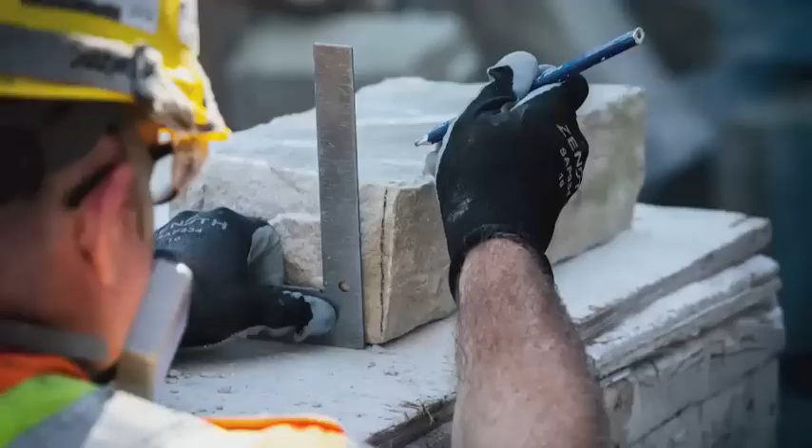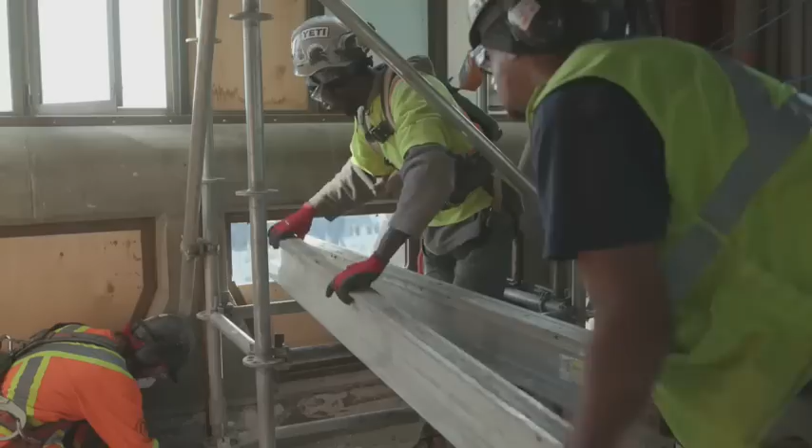Currently, there are more than 450 workers on the site daily, and that number will increase once the project reaches its peak, bringing together a diverse range of experts in areas from engineering and construction to architecture, masonry, and restoration. It is the largest and most complex heritage rehabilitation project ever undertaken in Canada.

At the helm is Jennifer Garrett. Since 2016, she's been the Director General of the Centre Block Rehabilitation Project and is currently an acting Assistant Deputy Minister with Public Services and Procurement Canada, the government department responsible for overseeing Parliament Hill's buildings.

The building was actually in great need of restoration before it moved out. It looks beautiful, and to the naked eye, when you walk through it, one might think that it was not in need of rehabilitation. But the reality is, if you look closely, you will see the leaks from the roof, the places where the building has suffered quite dramatic change. And if we hadn't intervened into the building, we would be actually putting parliamentary operations at risk.

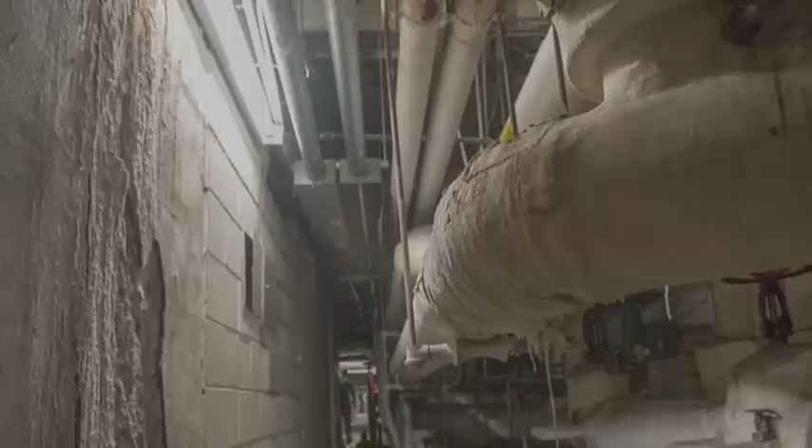For Garrett and her team, the to-do list is extensive. There are also leaks from water and heating pipes that date back to the early 20th century, like these found in the basement. The ventilation system was designed for a time when wood-burning fireplaces heated offices. It now needs to be replaced.

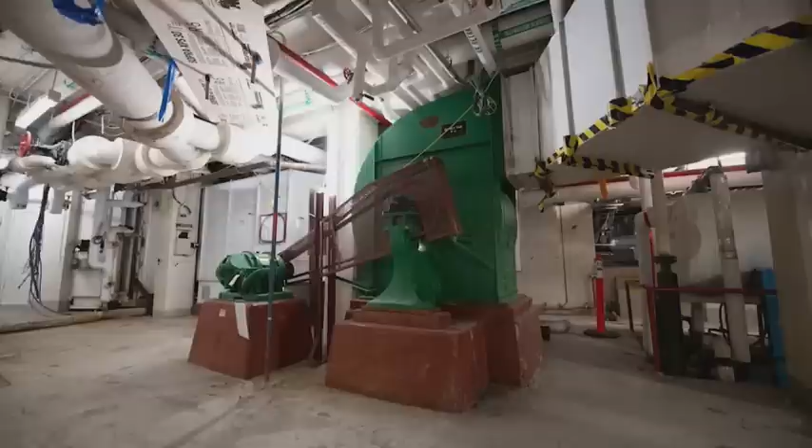There are damaged sculptures, crumbling mortar, and cracked stones. If left unchecked, some of those sculptures and the stone around them would disappear.

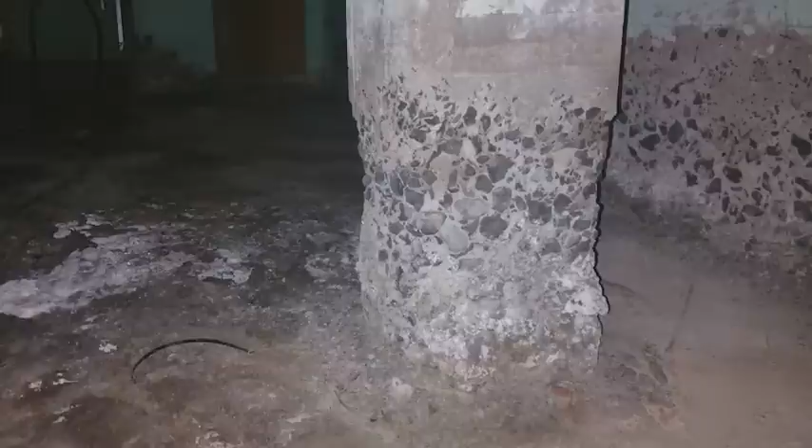The concrete that supports the building is also deteriorating. One example is this column in the basement of the Peace Tower. And there's the steel inside and outside the building - it's rusting and breaking.

The building hadn't undergone a major renovation since it was rebuilt after the fire of 1916. When you get a building that's in the 100 years range and you have an active parliament operating in it, the only time that you really get to do little tweaks to the building are during recesses and the summer period. And that is just sometimes inefficient to do some of the major rehabilitations that had to be undertaken in this building after 100 years.

So that's why there was a deliberate plan put into place to actually create other accommodations for the chambers and for parliamentarians and their administrations so we could empty this building and do what is required to it. The plan saw MPs leave at the end of 2018 and move into a temporary House of Commons chamber in West Block.

And senators relocated to the Senate of Canada building, formerly Ottawa's downtown railway station.

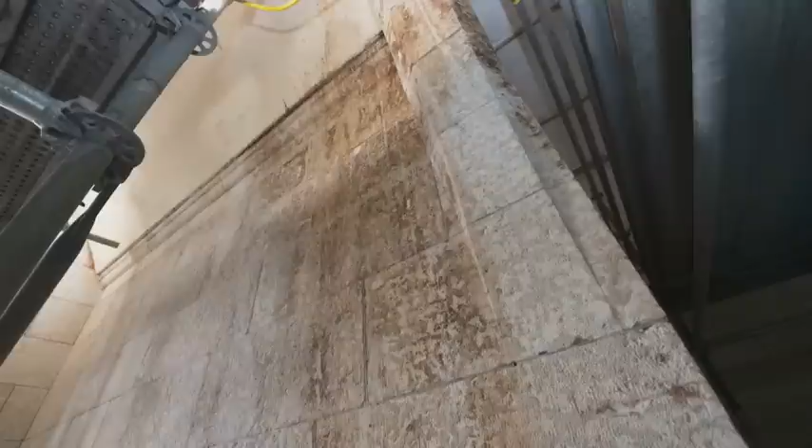I'm happy to say that our operations did a great job of getting us to the finish line, but even then we were having issues at the end—elevators breaking, water infiltration. We had a substantial leak about 3 weeks after the building shut down that would have definitely had an impact on parliamentary operations. So we made it. We made the building run till the end, but it was on its really last legs, and we were really worried about it having a significant impact on shutting down Parliament, which would be absolutely a catastrophe.

We want our Parliament to run.

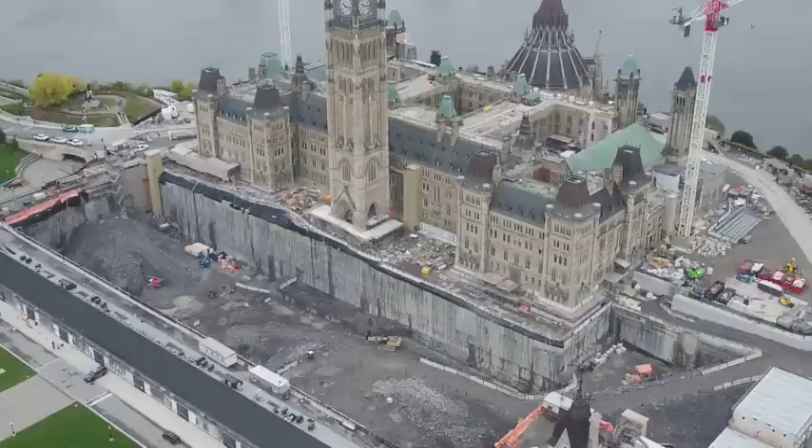The Centre Block Rehabilitation Project is now in full flight, the key part of a decades-long rehabilitation and modernization effort across the parliamentary precinct.

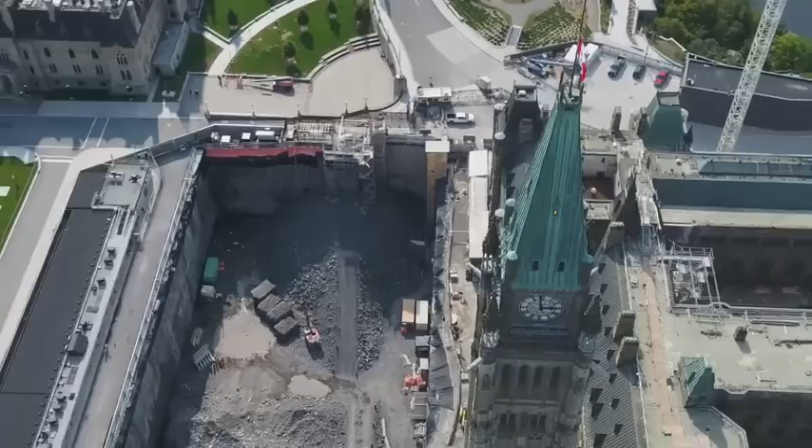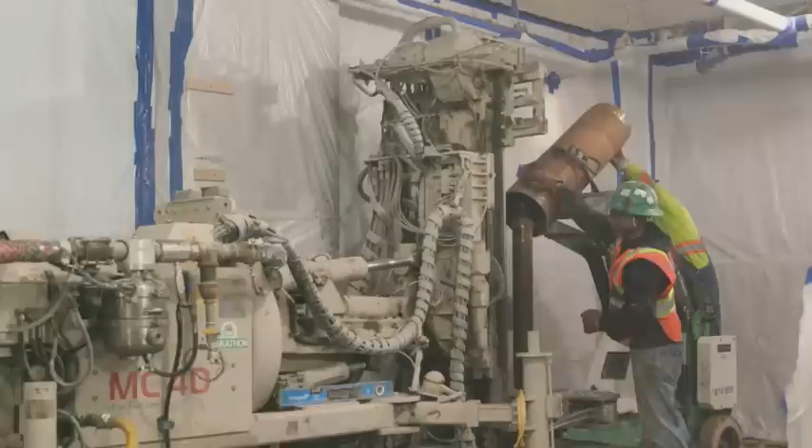The 3 stages of construction are essentially: phase 1 involves taking the building apart. Phase 2 involves building those base building features back up, like doing structural upgrades and putting the mechanical systems in place. And phase 3 is the beautiful part of the job—finalizing the features, fitting up the spaces and how they're going to look, putting those heritage features back in the building.

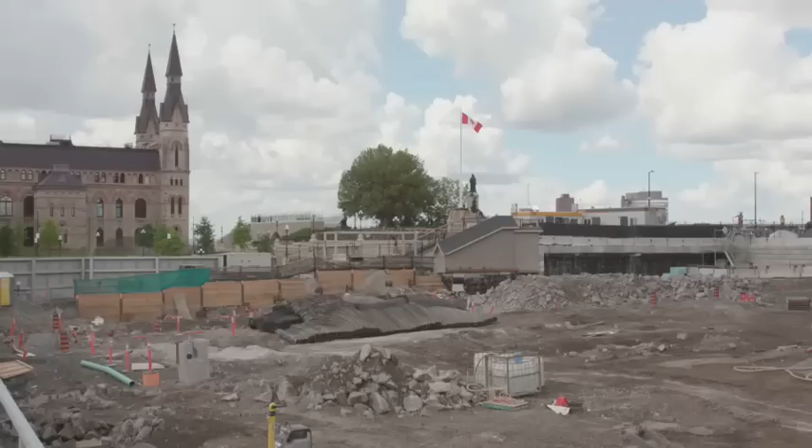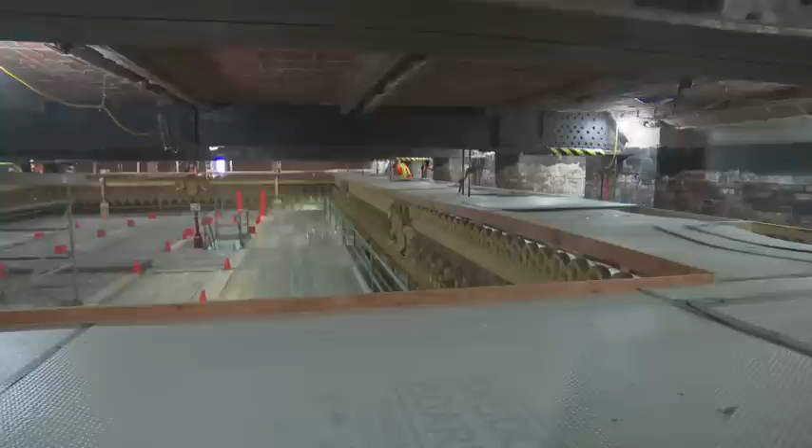Where we are at this current phase in the project for the Centre Block is we've effectively finished phase 1 and we're headed into phase 2. What I mean by that is we've finished the extensive demolition and abatement program to remove designated substances. That finished in December '23. And now we're at the part of the Centre Block program where we're starting to initiate the structural upgrades for the building.

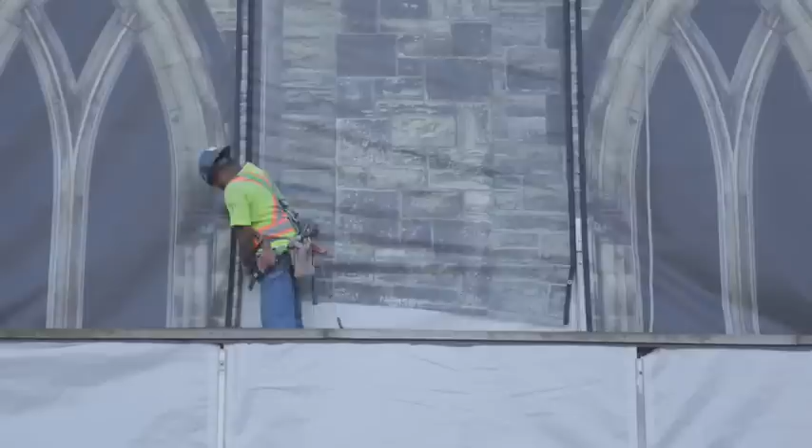It takes a village to deliver projects like these. We do have a plethora and a range of broad-ranging skills working on the program because we're still designing as we construct. We're flying the plane while we design it, and that's a deliberate strategy on our part.

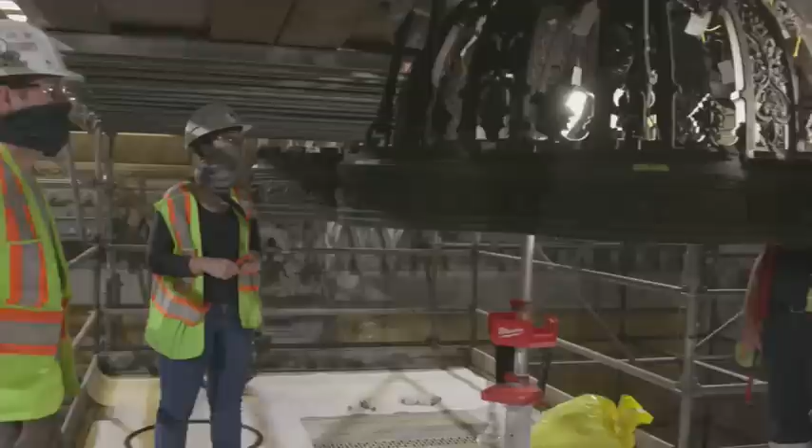And beyond that, as the design continues to evolve and gets finalized, those later packages with the finishes will be released almost like just-in-time delivery to the construction team. That integrated effort allows us to optimize the schedule and ensure that parliamentarians get the building back as soon as possible.

On November 6, 1867, Canada's first Parliament met here in the House of Commons.

This is what Centre Block looked like in those early days of Confederation. Back then, Ottawa was perhaps not the most sophisticated of places. Many had been surprised a decade earlier when Queen Victoria named it the capital. Canada's first Governor-General, Lord Monck, remarked that the place could never amount to much. Lady Monck's criticism was harsher, writing in her diary that they were much disgusted by the squalid look of Ottawa. I went on wondering how we could ever live there.

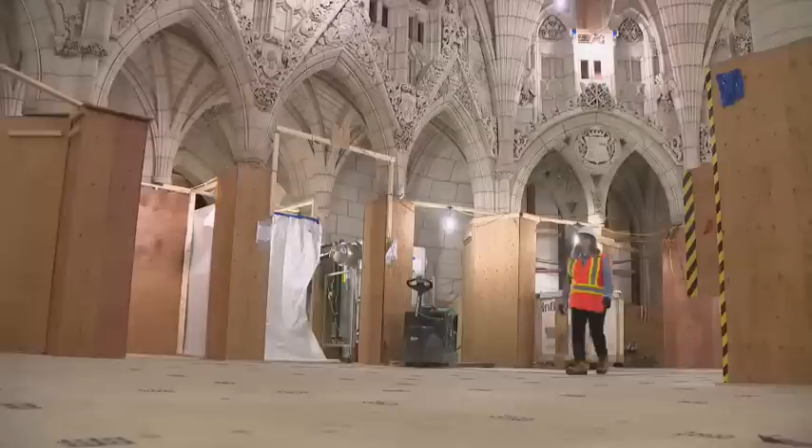Johanna Mizgala is the House of Commons curator. She knows more about the history of this building than just about anyone. To understand the building on Parliament Hill and its context for the renovation and restoration plan, we really have to go back in time and consider the original building, which sat on Parliament Hill and was designed by Thomas Fuller and Chilion Jones. That building was a neo-Gothic building, and the building we know today shares some similarities in terms of its exterior, but it's a very different and truly 20th century building.

Centre Block officially opened in June 1866, but the Parliament buildings were not yet complete. A year later, on July 1st, 1867, the Dominion of Canada was born. Along with it came an enhanced sense of pride towards Ottawa, its reputation as a muddy shanty town fading fast. The young capital was growing and transforming.

Ornate, decorative, and innovative, many regarded this group of buildings as some of the finest examples of Gothic Revival architecture in the world. That building was on the site for about 50 years. Then on the 3rd of February 1916, a fire broke out and essentially destroyed the building.

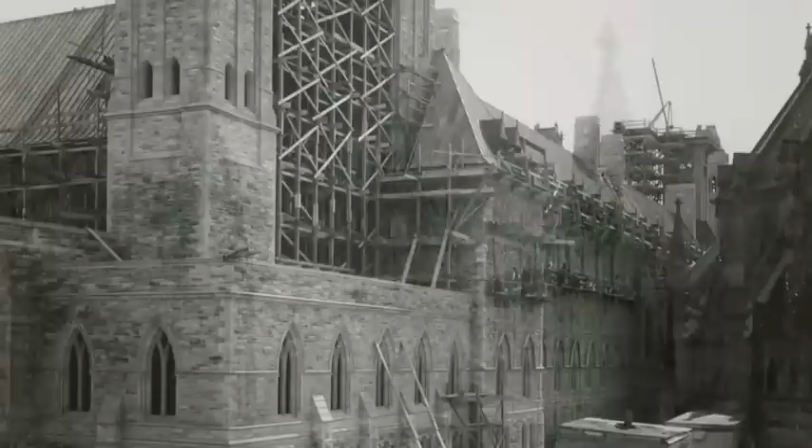With only the library still standing, Pearson and Marchand proposed a brand new structure. Their design was a neo-Gothic exterior with a distinctly modern interior. They took into account the original structure from the exterior, so it looked very much like what had been there originally, but very much a Beaux-Arts 20th century building inside.

So they wanted the architecture to speak to the people who would have to use this building, to tell them about the places that they come from, the people that they represent, and essentially the duty that they had to Canadians. They were chosen, they are elected to represent a much wider constituency than themselves, and they are brought together to make decisions about legislation which ultimately trickles back to those people.

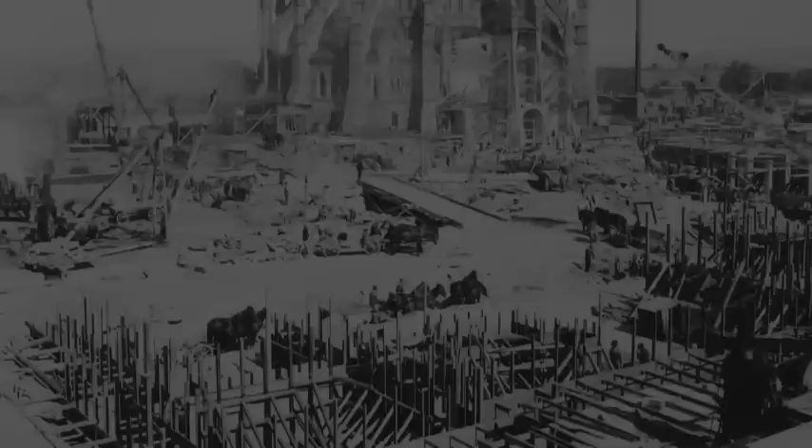By the fall of 1916, the reconstruction of Centre Block was well underway. But the country was still in the grip of the deadly First World War, and Parliament urgently needed a place to sit. The House of Commons and Senate would meet in the newly completed Victoria Memorial Museum, now the Canadian Museum of Nature. Fossils, minerals, and exhibitions were pushed to the back of the room. For nearly 4 years, this was the home of Canada's Parliament while construction of Centre Block continued.

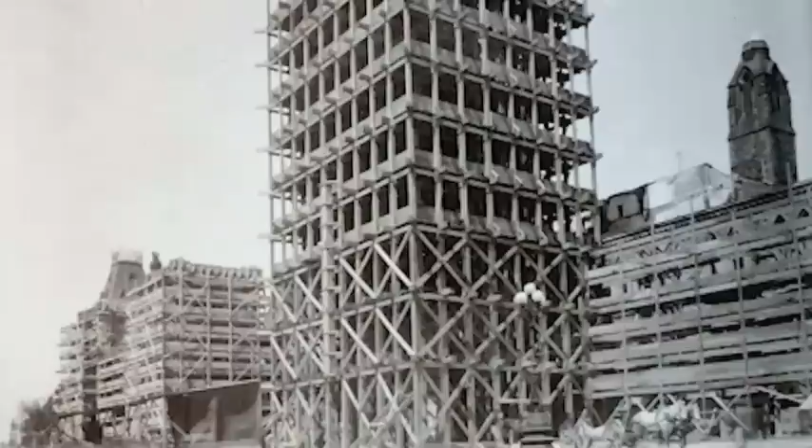Construction occurred between 1916 and 1920. They moved back into the space in 1920. Construction continued over the next almost 10 years with the Peace Tower. And then over the years since, the decorative program of the building has continued right up until the closure of the building in 2018, when we moved out so that we could restore and rehabilitate the building for the 21st century.

Architect John Pearson oversaw every detail of the building's design. Pearson designed what we would call a total work of art, in the sense that not only the physical structure of the building, but the decorative elements, the furnishings, even the organization of space, was all about making sure that people understood what the building's purpose was, why it exists, and what happens in that building.

So it is, of course, the space where the legislation of the country is determined, and MPs and senators have this very important role to play, and they need an appropriate space for that work to occur.

The Beaux-Arts style is really a 20th century plan, and it's characterized by a hierarchy of space, a simplicity of sense of purpose for the building. So there's a hierarchy in terms of decorative elements, which means that the spaces that are the most important to the understanding of the place warrant the highest decoration and highest design principles.

So when you go into Centre Block, you are immediately to understand where you are. You're immediately to understand that everything to your right is related to the Senate, everything to your left is related to the House of Commons, and that there is an order and a structure to the space.

So the highest decorated spaces are, for instance, the two speakers' offices, because in a sense it is their house. Then you would think of the chambers, because that's where the most important work happens, and then the Prime Minister's office and the Leader of the Opposition. And then there's an organization to the rooms that are for public functions.

But as you go up to higher and higher floors and you get to office spaces, it really looks a lot like any sort of typical 20th century building of the time. There's a pragmatism to the way that decor is used. There's a choice of finishes. The noblest materials are used in the most important places.

So the kinds of wood, the kinds of marble, everything is conceived to give you a sense of this place and understanding. So as much as possible, Canadian, or at the very least North American, materials were used in the space to remind people of the places in which they come from to gather in Ottawa in these two chambers.

Pearson also included several themes that run through the entire building. One of the most integral is the ship of state metaphor. Here in Centre Block's main entrance, the figure of Neptune is carved into the central column of Confederation Hall.

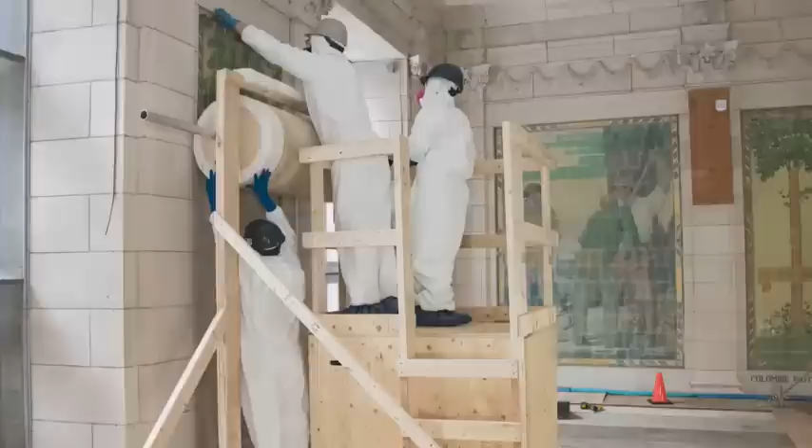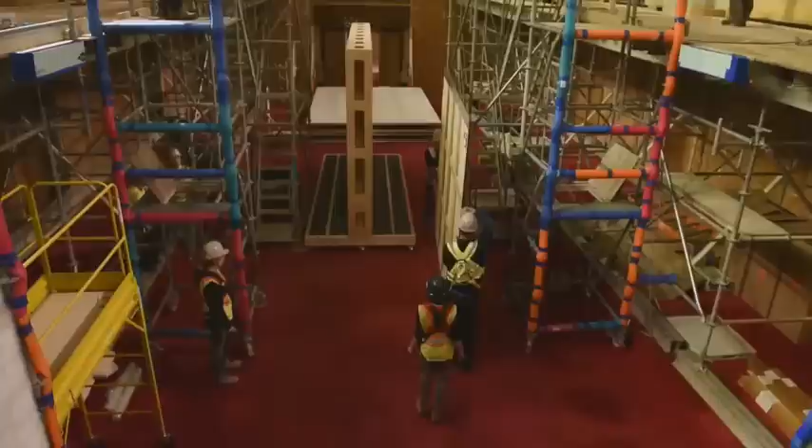An integral part of the Centre Block Rehabilitation Project is protecting and preserving more than 20,000 heritage assets, irreplaceable works that include paintings, murals, stained glass windows, sculptures, and woodwork. Many of these heritage assets have been carefully removed from the building and stored for safekeeping. The majority are undergoing restoration work.

Some items cannot be removed from the building and must remain. They have all been protected. There's a delicate balance between restoration and the need to modernize.

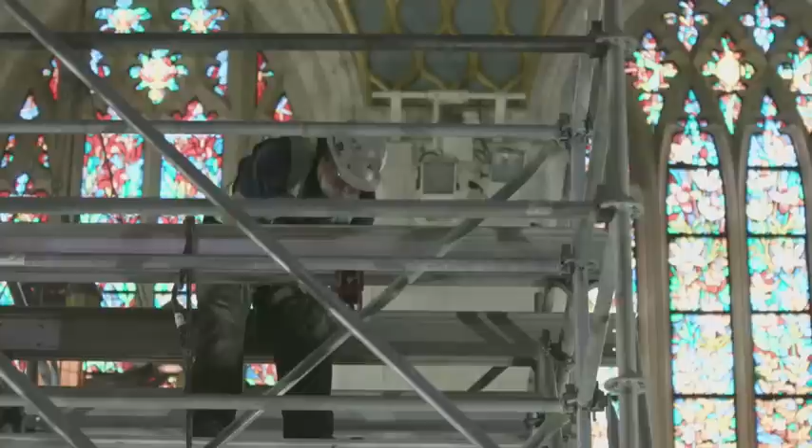Kate Westbury is the Heritage Lead for the Center Block Project. She oversees the conservation and heritage teams. Initially, the role of the heritage team is very much in the driver's seat. So what we saw in the early stages of the project was removal of all of the fragile assets from the building. Anything that's very straightforward, such as stained glass, heritage light fixtures, anything that could fairly easily be removed is done first. That clears it out of the way and allows other construction activities to take place on site.

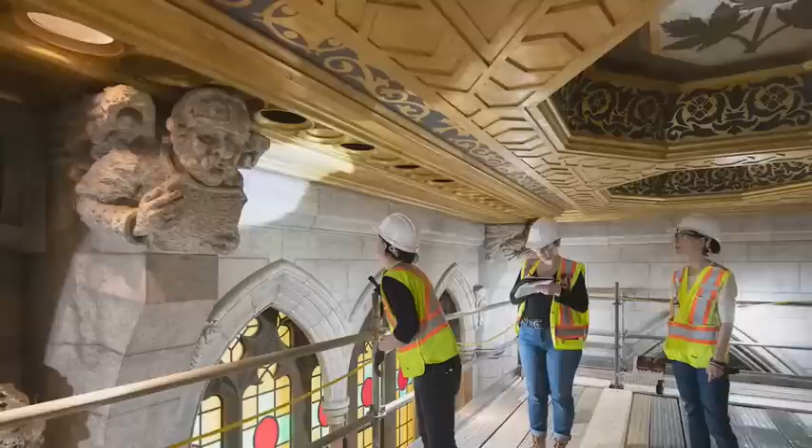Decisions to remove or protect are taken on a case-by-case basis. In some instances, the risks in removing heritage materials can be greater than leaving them in place.

This is the ceiling of the Senate chamber here at Center Block. It's plaster substrate, and it was brought in and installed post-fabrication and then finished on site. The stenciling that you see here has quite a few Tudor rose motifs, a lovely nod to our English heritage. We also have other motifs and medallions visible from the Senate floor, which include the Irish harp, the lion passant from the English throne. All of these harken back to our connections with the British Commonwealth and the British parliamentary system.

Over 170,000 sheets of gold leaf were used to gild this ceiling. It's a treasure here at Center Block, and fortunately it's in very good condition. We've had it assessed by our architectural paint specialists, and they agreed that protecting it in place was the right approach. Obviously, removing something like this could be quite harmful and invasive. So we've set up a very rigorous monitoring program for assets like this ceiling to ensure that we catch any issues early and remediate those right away.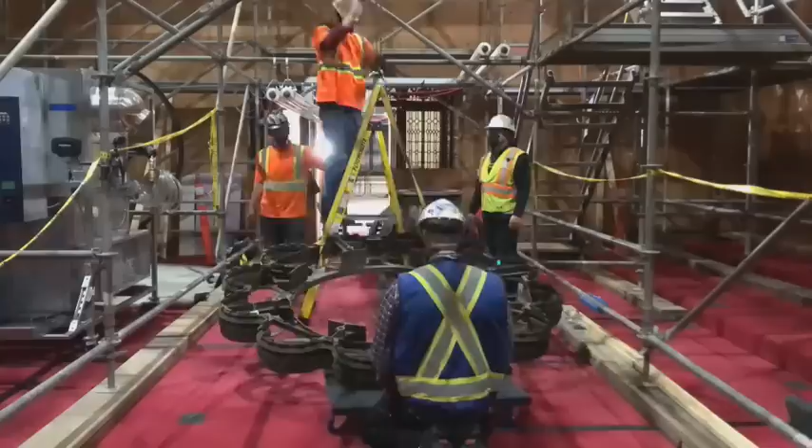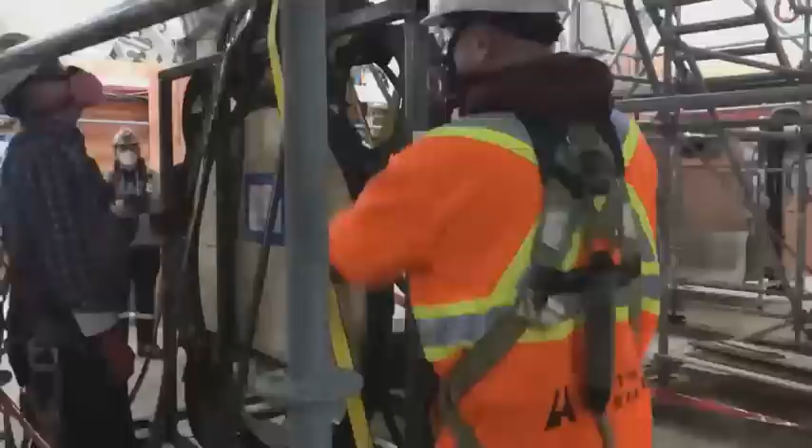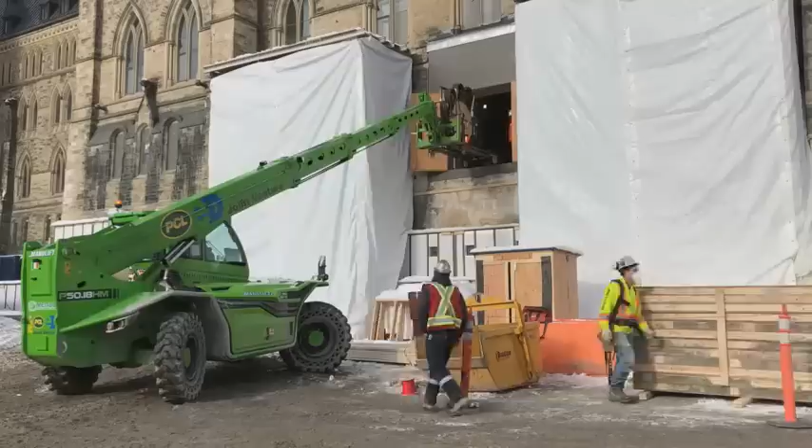The chandeliers in this space are the two largest light fixtures that we have at Centre Block. They were cast bronze and incredibly large, weighing over 3,400 pounds, and required a lot of strategic thinking when removing them for safekeeping. We had to produce a pulley system and get engineers involved to make sure we could remove the fixtures safely without harming the building. What made those light fixtures particularly unique is that they have one cast piece that needs to stay intact, and that large piece makes up the majority of its weight, so that was quite challenging.

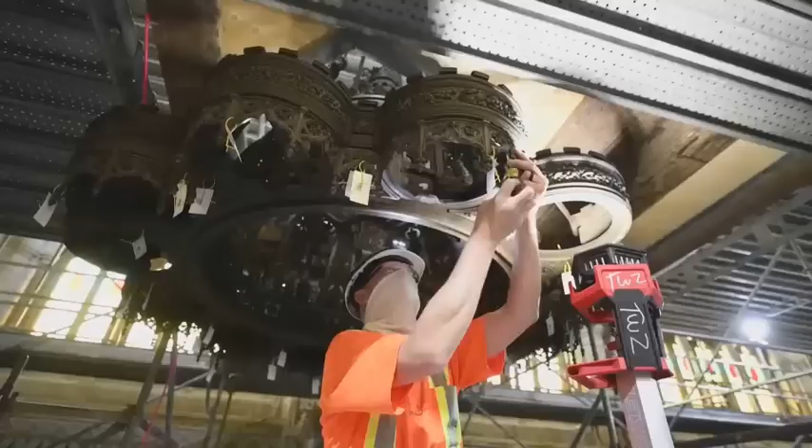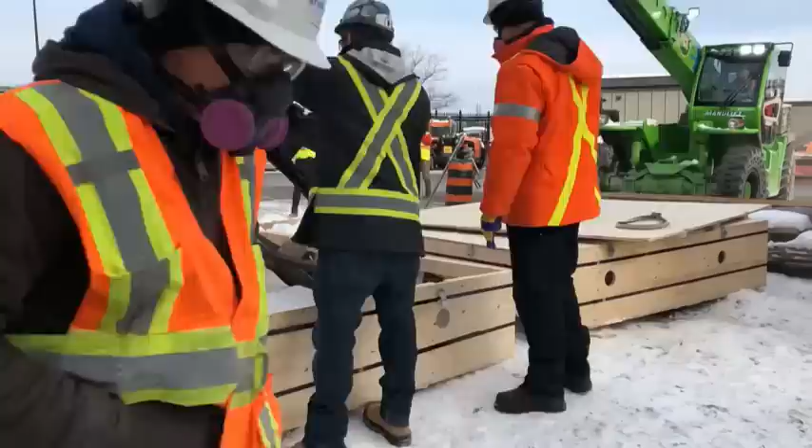Those light fixtures are arguably the most beautiful light fixtures in Canada. They've been removed and are currently crated and safely in storage, and we're actually working on their conservation and treatment plans as we speak. They will end up going to a lighting specialist where they'll be treated and rehabilitated, then slightly modified to meet our lighting requirements of 2023, and then reinstated here. We'll have to go through that logistically challenging process again, backwards.

Another challenge conservators face is removing murals that have adorned the walls of this committee room for nearly a century. That room originally was the House of Commons reading room, and as such, the design motifs in that space reflected the media, the printed word and journalism, so as a result we have a really beautiful collection of Arthur Crisp murals that reflect that, which is quite nice.

They're marouflage murals, which essentially is a painted canvas that's been applied by adhesive to the wall, which made its removal possible. If it was painted directly onto plaster, for example, it would be far more complex.

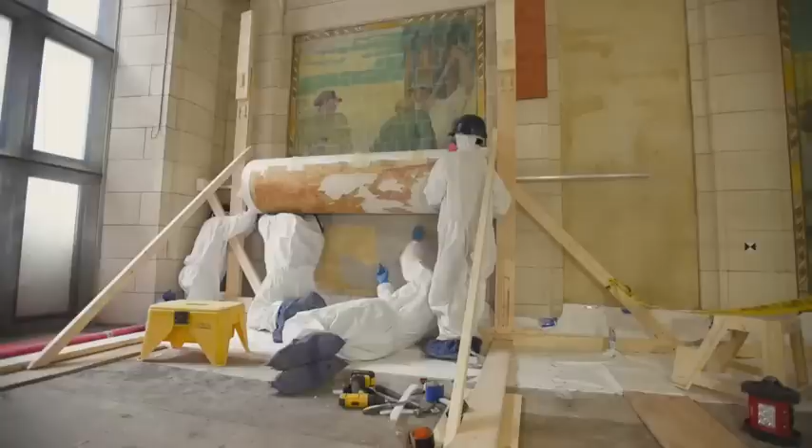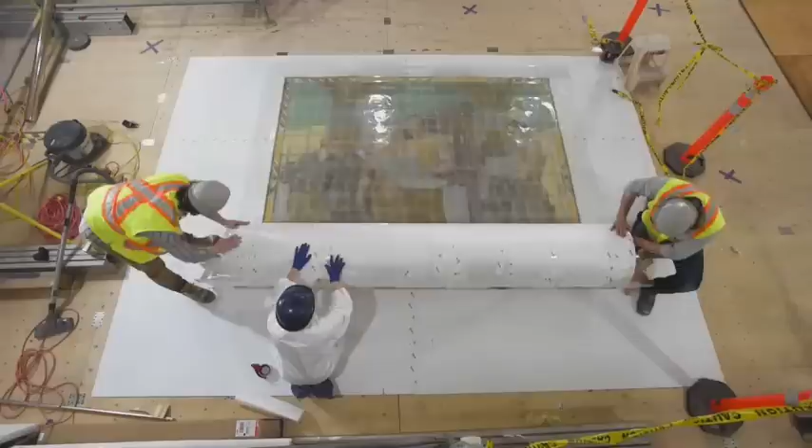So we engaged conservators from a local fine art conservation company who came in and removed those works of art quite painstakingly, scraped gently to remove each piece and rolled them up. Then all of the skim coat still stuck to the reverse of those has to be removed in order to safely roll them and then put them either in storage or take them off to a conservation lab for treatment. Quite an onerous process.

Here, in the office of the Leader of the Opposition, another arduous procedure is taking place: the removal of century-old frescoes. These were painted by Italian artist Attilio Pusterla in 1920.

The frescoes in the space are designed to reflect certain ideals of what a leader of the opposition should do. So there are things about justice and virtue and making sure that you're holding to the truth.

William Lyon Mackenzie King was leader of the opposition at the time the building was being designed, and he worked very closely with Pearson on the designs and things he wanted to incorporate into the frescoes. This face of an angel appearing to a knight is believed to be based on King's late mother. He chose to stay in this room when he went from opposition leader to prime minister in 1921.

Fresco is a kind of painting where the paint is applied to wet plaster, so when the paint dries, it fuses with the plaster and becomes part of the wall.

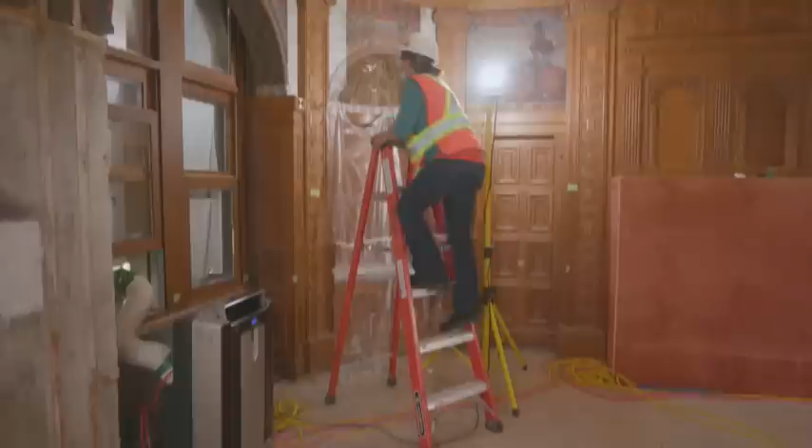So in order to restore those pieces, they had to be physically removed from the space. Just as the wood paneling creates a sort of piece of furniture in the space, those elements also have a specific place, and they have to be very carefully removed so that they can be very carefully put back into the original spaces.

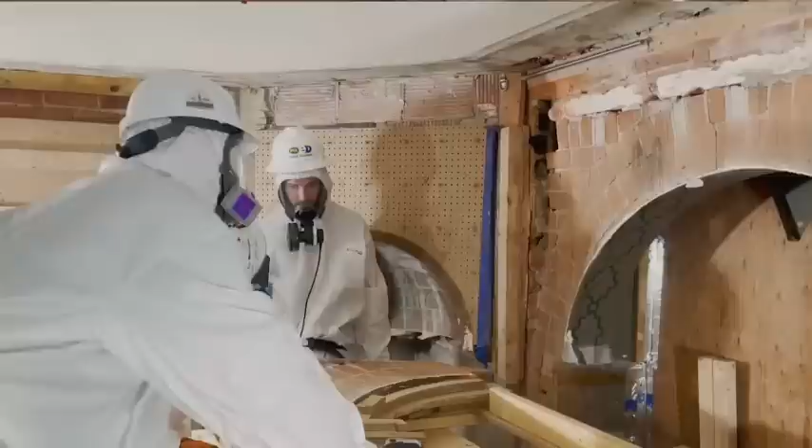Once conservation treatment is complete, the frescoes will remain in storage until they can safely return to Centre Block.

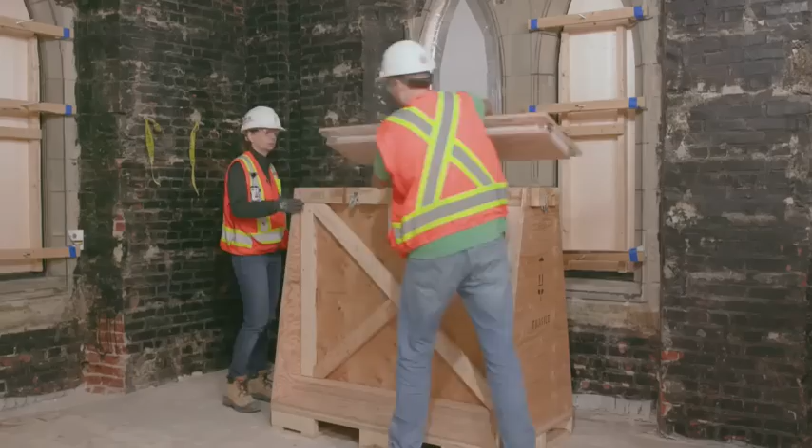There's scaffolding throughout Centre Block. It's obviously required for the work itself, but it also offers a new perspective on the building.

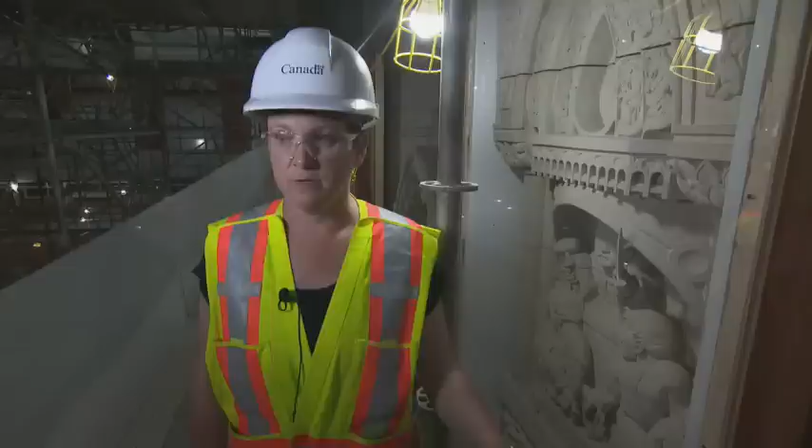We are in the House of Commons chamber here at Centre Block, and the beautiful carvings you see protected in situ here belong to the British North America series throughout the chamber. What's really great is that we get this unique opportunity right now to see them up close and really get a sense of the high level of craftsmanship and artistry involved in sculpting something with such detail.

This is a really good example of where the removal of heritage building fabric could be quite damaging and too onerous and unnecessary at this point. So we have protected these in place along with a lot of the stonework here inside the chamber.

So we have an opportunity to do a thorough assessment of its condition, and then in turn we'll also be able to do a thorough cleaning of this as well, because over time the dust and debris that settles on these decorative elements is quite significant and really affects the legibility of these sculptures from a distance. So we're getting an opportunity to clean all of that dust and debris away, and what we'll see is a beautifully kept sculpture post-rehabilitation.

Another heritage asset that will be returned to Centre Block is this beautiful fabric ceiling. It's been a part of the Commons chamber for nearly a century.

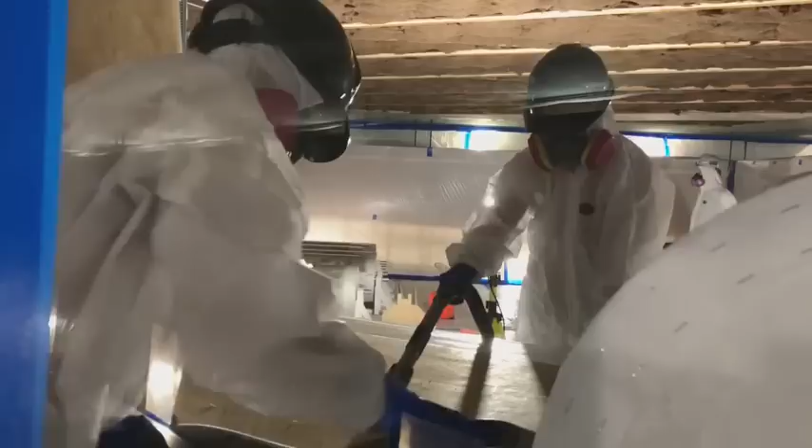The ceiling, quite different from the Senate chamber, was actually a painted textile—a linen—and it was all removed as part of our early fragile assets removal project. That was to get it out of the building and into safekeeping, so it could clear the way for the demolition and abatement process that is required.

There's quite a bit of asbestos in and around the ceiling here in the chamber, and if we can get that out of the way, then we allow that abatement process to take place.

It was a complex removal in that we had to develop all sorts of tools and apparatus in order to safely remove and roll it as we took it down, because we had some incredibly long strips of textile that needed to be removed all in one piece.

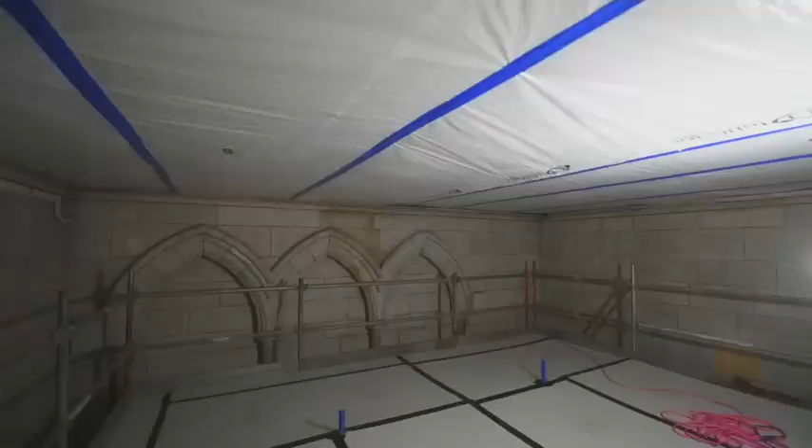So the ceiling has all been rolled onto large oversized tubes and been very well packaged, because it could still contain some hazardous materials such as asbestos. It will be thoroughly cleaned and conserved prior to reinstatement in the building.

The stained glass windows of the Commons chamber were added in the late 1960s, around the time of the centenary of Confederation. Speaker Lamoureux commissioned a number of projects for the building that would relate to this 100 years of Parliament. One of them was the stained glass windows commissioned for the chamber. He had the Dominion sculptor at the time, Eleanor Milne, create a series of drawings that would eventually become the stained glass windows. What she had in mind was to create a window for each province and territory, as a means to remind the parliamentarians of where they come from and why they're in that space.

Each one has the official flowers and certain symbols unique to those places within the country. What we know about the stained glass windows is that the glass itself comes from all over the world, and that's a nice little metaphor for Canada as a country—that people have come here from all over the place and are all represented in that space.

He leads a team of conservators who are working on preserving the stained glass windows of Centre Block. All of the stained and leaded glass throughout the building is being worked on in one way or another. For the most part, everything is being restored.

And that's no small feat. Centre Block houses 250 stained glass windows, and some contain more than 100 panels.

The restoration process starts with disassembling the entire window piece by piece. It's a painstaking process—we spent about a year on site just documenting everything, photographing it, measuring it, writing reports on it, and so on.

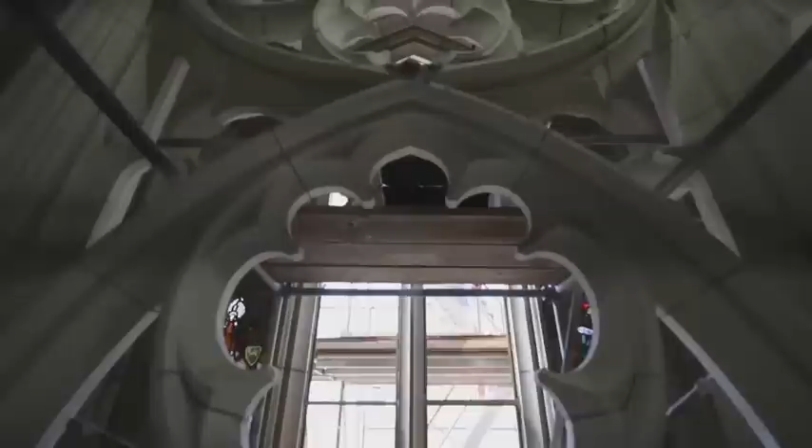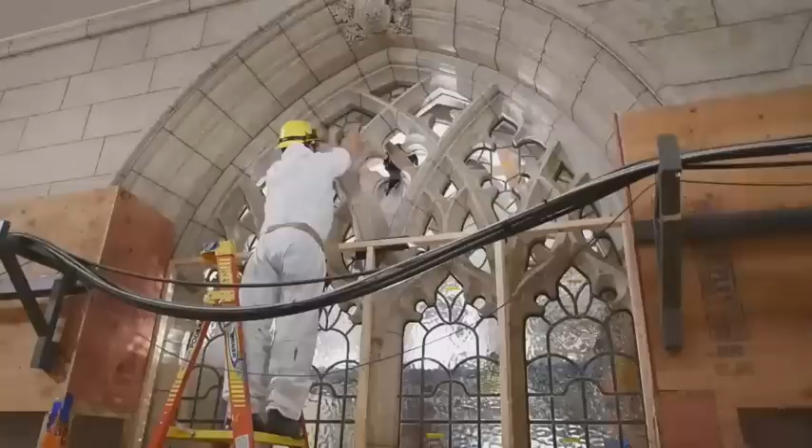Then we spent the next two years, as part of the fragile assets removal team, removing all of the stained and leaded glass. The windows in Centre Block, a lot of them were installed into stone reglets, which is a very old method where it's basically just a channel in the stone and the lead is carefully maneuvered out. Some of the windows are in wooden frames, and some are in metal frames, so those are quite easy to remove, but the stone reglet ones are more challenging.

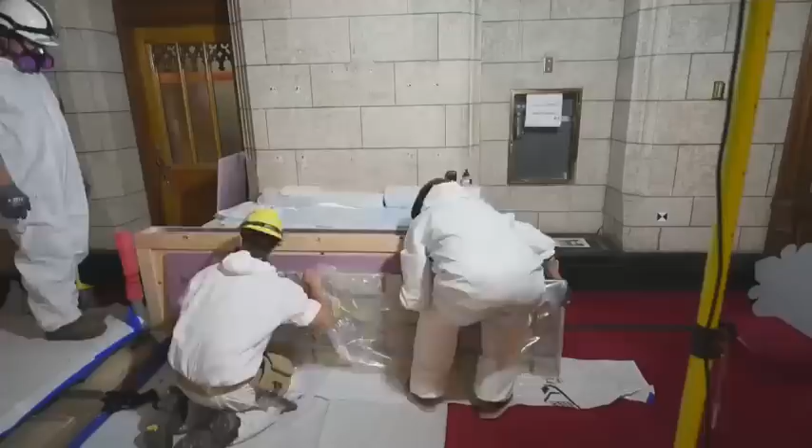We've never lost anything in transit. For this we had to make 800 crates, and we made them ourselves in our studio. We're one step ahead of the abatement crew—we went around and removed all of the stained and leaded glass, crated it, and shipped it to the McCoon Center at Pink Road in Gatineau.

Then the studio restoration work started. What we do is go to Gatineau and get about a month's worth of crates to work on. We bring them to the studios, work on them, and once they're finished and signed off on, we return them to Pink Road and grab the next batch of crates. We'll be doing this until about 2026.

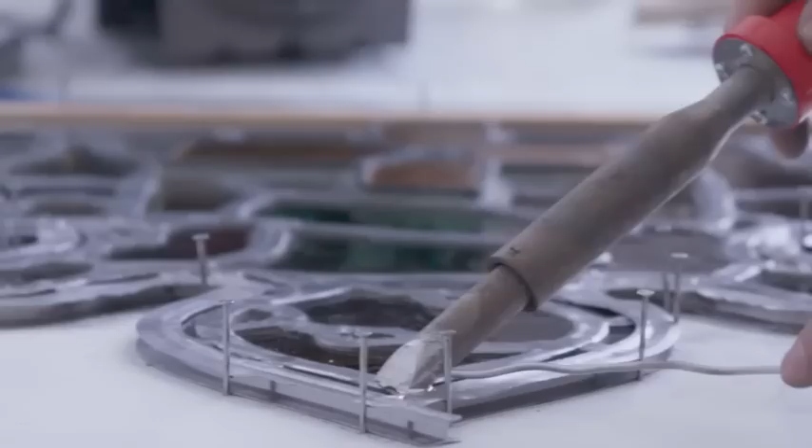The stained glass windows are now undergoing careful and complex restoration work. It includes fixing any damaged glass, re-leading, and cleaning. The lead is oxidized and can be dangerous, so the windows are taken apart underwater, so nothing becomes airborne.

This panel has been completely restored and has had all of the lead replaced. We did the same process we did for the other windows: we document it on site, we crate it and transport it to Pink Road, we retrieve them from Pink Road, we get them here, we disassemble them in a bath of distilled water with different additives to help with the work, and then we reassemble the window on a rubbing that we've made of the old lead armature before we've taken it apart.

This panel is from one of the House of Commons windows, the Ontario window. It's the northernmost window on the west wall. This is one of the lower lancet panels, and of course it has the trillium flower as the motif. Normally when this gets reinstalled, it's a vertical panel, but I thought it would be better for presentation at eye level like this, where we can see everything.

Sometimes these century-old windows contain broken glass. As conservators, Mark and his team are tasked with holding on to as much of the original material as possible. If the glass is broken, we glue the fragments back together with a special optically clear epoxy called Hxtal NYL-1, specially formulated for glass. It's very strong. Because a lot of the glass that did break was very, very thin, we'll often reinforce the Hxtal piece with a backplate.

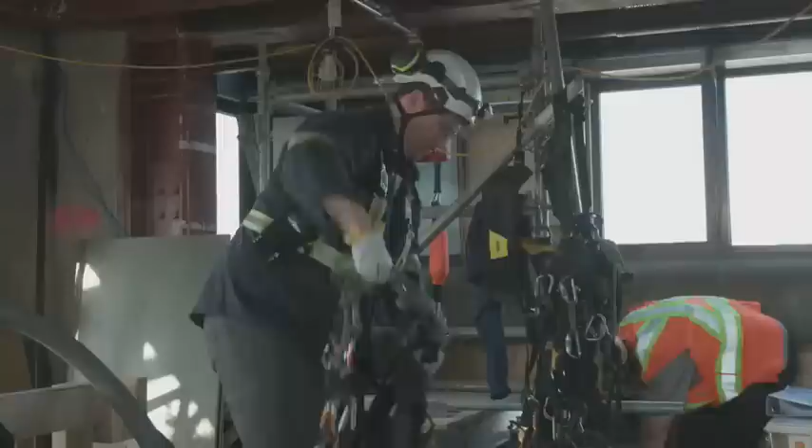As part of Centre Block's restoration project, a team of experts have been brought in. These are rope access specialists, and their job is to protect the four historic pinnacles located on each corner of the Peace Tower.

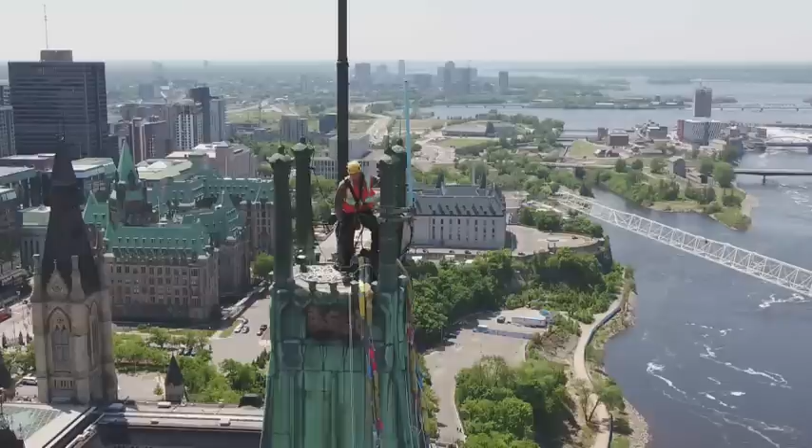It's a tall order, and not for the faint-hearted. The pinnacles are being temporarily wrapped and secured while construction on Centre Block continues. Monitors are also being attached to each pinnacle to measure vibrations. Keeping the Peace Tower safe is of paramount importance to the team here. After all, it is arguably one of the country's most iconic landmarks. History is etched into the walls here.

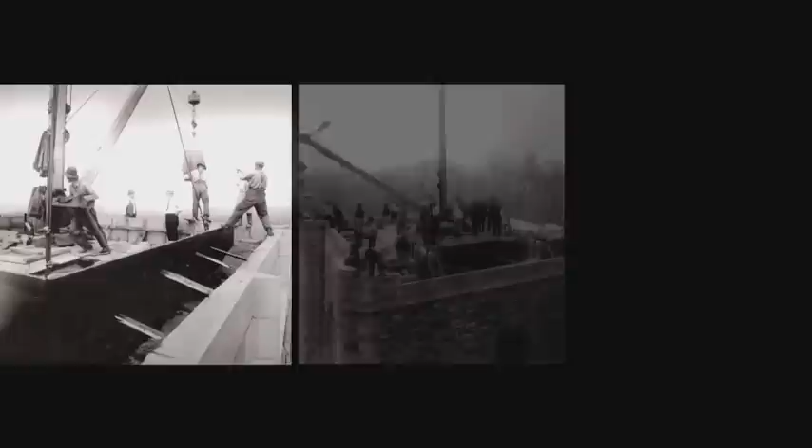Construction of the Peace Tower began after the fire of 1916 destroyed the Victoria Tower, part of the original Parliament buildings. Designed by architect John Pearson, the tower was the last part of the building to be built. It rose section by section.

During this process, Pearson carefully studied the design, and he produced sketches and study models at different intervals. He was determined to create a tower fitting to serve as a memorial for those who had lost their lives during the Great War. It was a heavy responsibility, and it's been said that Pearson even dreamt of the tower and, in his own words, lived with it so long, day and night, in his desire to produce a suitable design that met both his aesthetic and engineering vision. Some believe the Peace Tower was architect Pearson's crowning achievement.

There were other names considered: the Victoria Tower, the Tower of Victory, the Tower of Peace and Victory, but Pearson was adamant. It could only be the Peace Tower.

The tower houses a 53-bell carillon. It's a unique musical instrument and a complex feat of mechanics. A huge grouping of bells played by a musician known as a carillonneur who sits at a special wooden keyboard. Striking a note pulls a metal string attached to the clapper of one of the bells, causing it to sound. Each bell sounds a separate note, and the bigger the bell, the lower the note.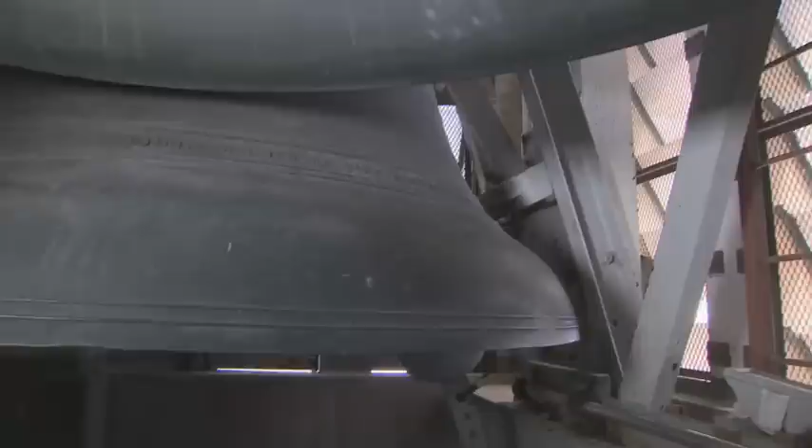The Peace Tower Carillon was inaugurated on July 1st, 1927, also the Diamond Jubilee of Confederation. A crowd of 60,000 people gathered to join the ceremony and hear the carillon for the first time. It was also the first live national radio broadcast, and it was reported that several million people tuned in.

It was thereupon decided to install the carillon as the crowning feature of the Memorial Tower and as the most fitting symbol of peace. Then Prime Minister Mackenzie King called the carillon the voice of the nation.

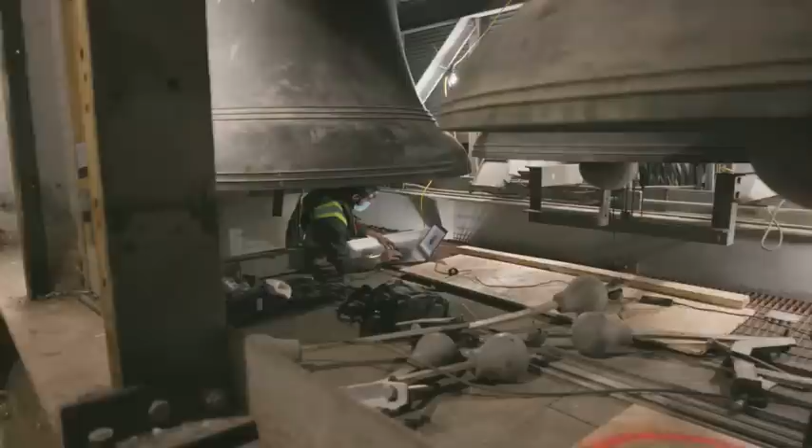Now, nearly a century later, the voice of the nation needs to be fine-tuned, refurbished, and restored. And that takes people like Caitlin Rouse. I'm a project technician, and I manage scope, cost, and schedule for the scanning and partial disassembly of the carillon.

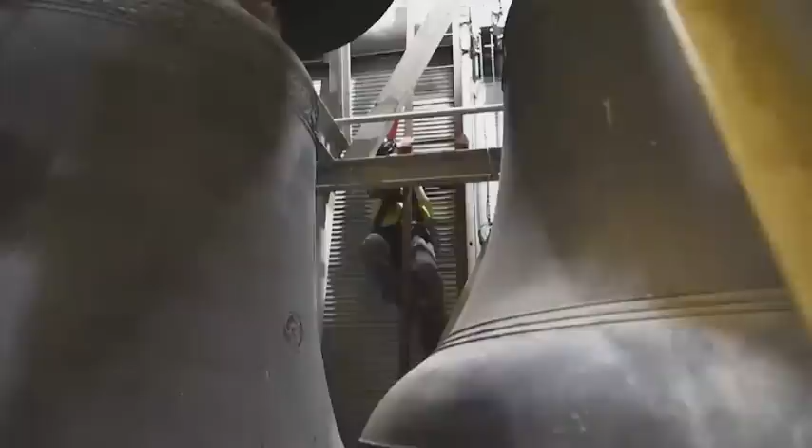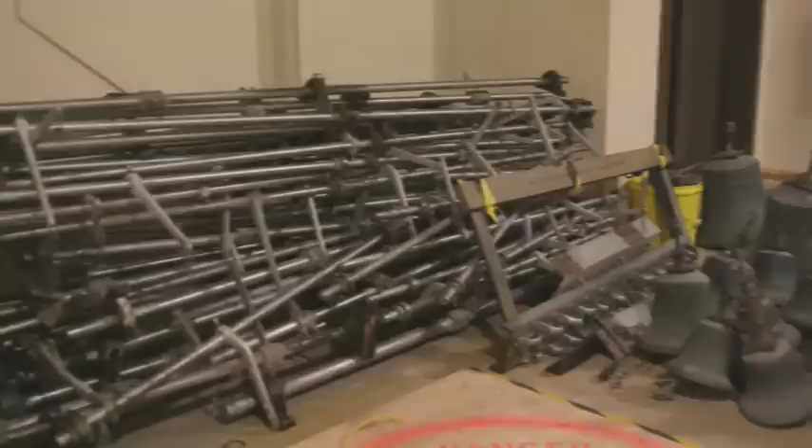There are two aspects to that. The first is structural intervention to the Peace Tower, so in order for us to advance that work, we need to remove the heritage assets within the belfry. Secondly, this is the first time we have the opportunity to come in since they were first installed in 1927, to restore and refabricate select carillon components for general age and wear, and also to improve the sound quality of the instrument.

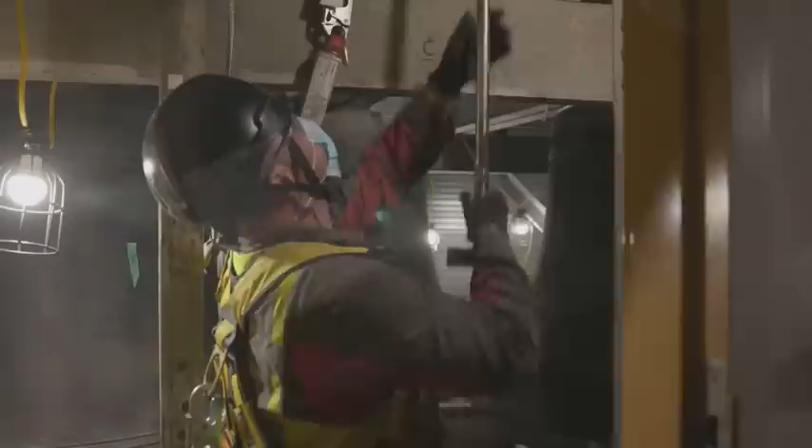Royal Eijsbouts is a conservator based out of the Netherlands that restores and refabricates bells, and they were selected to remove and restore the carillon bells.

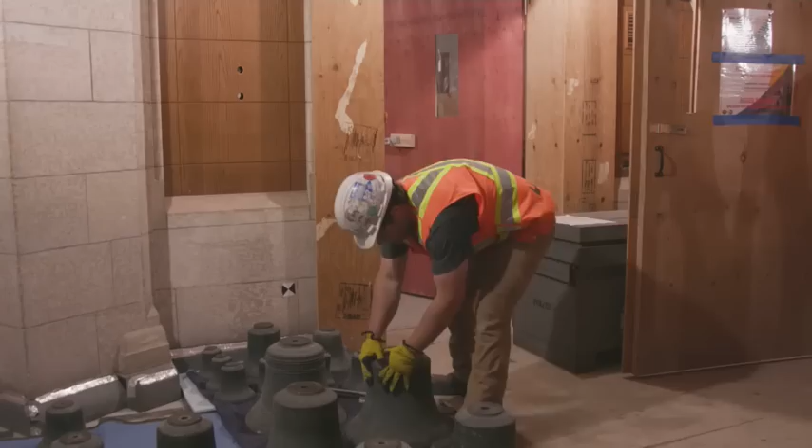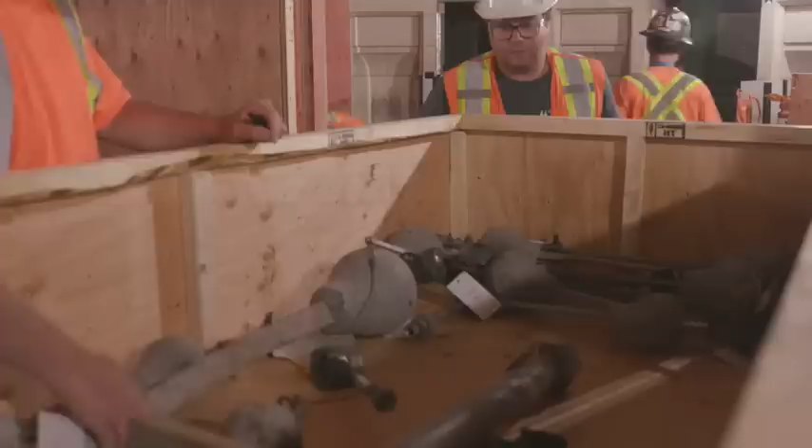When Royal Eijsbouts came and did their initial site review, they decided that only 22 bells would be sent over to their workshop. All the clappers, 53 of them, went along with the 22 bells, as well as the keyboard and the mechanical action system.

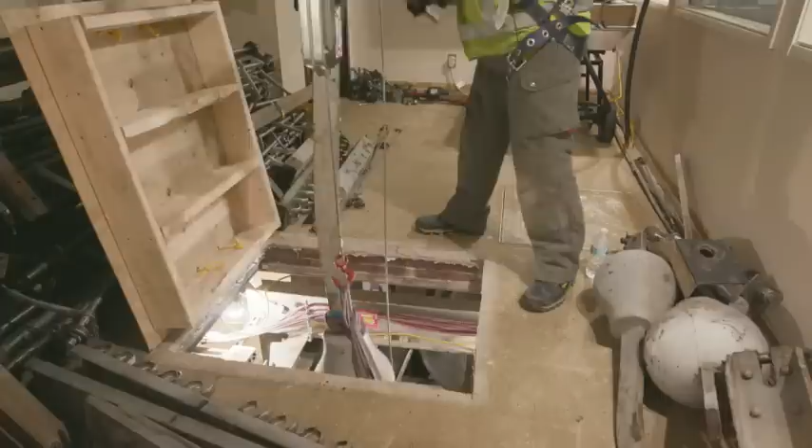The largest bell is over 10,000 kilograms in weight, and we had to remove the three largest clappers to ship overseas. One of the challenges we overcame was removing those, and in doing so we had to create a hoisting procedure to get them down safely and out of the building.

To get them from Ottawa to the Netherlands, we partnered with the Canadian Armed Forces. They were shipped from Ottawa to Trenton, and from there they got on an airplane and flew all the way over to Eindhoven, Netherlands.

The keyboard is going to be refinished and restored, and the mechanical action system is going to be newly manufactured.

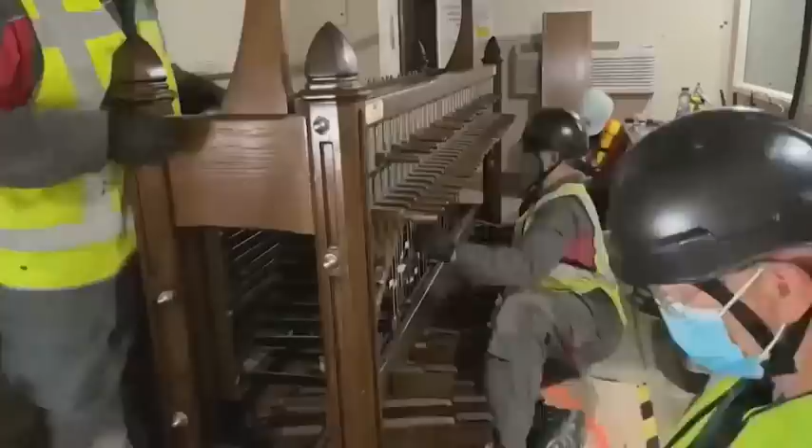There will be no modern updates added to the carillon. Rather, we are undoing interventions made over the years to better match its original state, just to ensure that it can be played on for the next 100 years to come.

The carillon was commissioned to commemorate the fallen heroes from World War I, and it's also directly tied to our cultural identity as they are rung during ceremonies and celebrations here on the hill.

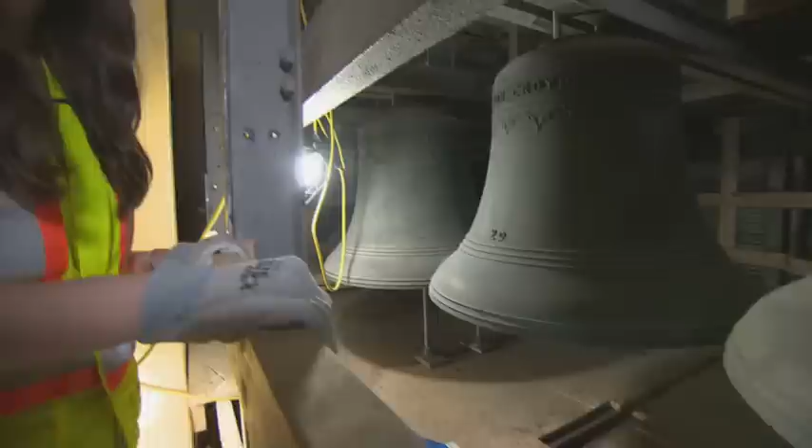I feel as though I'm a part of Canadian history. I remember back as a co-op student, we were taking a tour of Centre Block, and one of the stops was going up the elevator to the observation deck where we're standing right now, and you get a little glimpse of the bells as you travel up. Little did I know that five years later I would be assigned to that project to have them removed. So I'm really proud to be a part of a piece of Canadian history.

Located on the second level of the Peace Tower is this space, the Memorial Chamber. It's both beautiful and poignant.

Long considered the heart of the tower, this solemn and sacred room was originally created to honor the Canadians who had died during the First World War.

The Memorial Chamber is a space of contemplation, meant to be happened upon as you come from the building and make your way over inside, up the stairs into the Peace Tower. You're physically in a separate building, and you come down a little corridor and then into the light—a very bright space because of the stained glass windows that are several stories high.

The ceiling is also multi-stories high, so you're meant to feel lifted up, but also as though you've come into a kind of sacred grove. Pearson thought about it like you would be coming in from a forest into a space in the middle through the dappled light coming through the trees. The ceiling design has these drop fan arches, giving a canopy of tree idea. It's called the Memorial Chamber, so it's not a consecrated religious space, but it has significance for reflection and paying tribute. It has a very different flavor than the rest of the building, designed to be quiet.

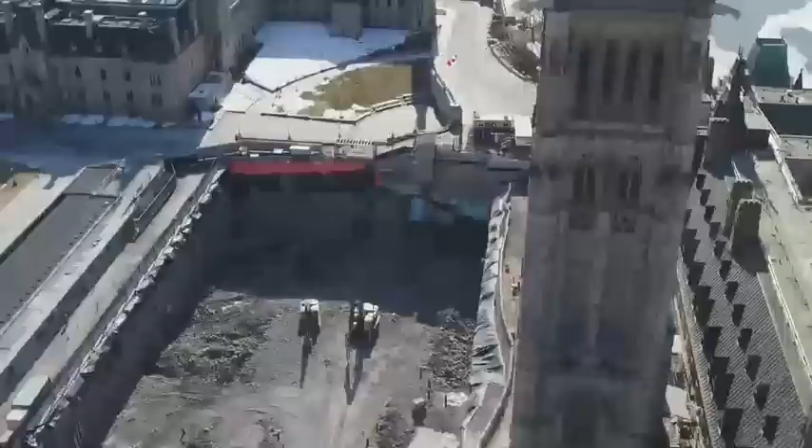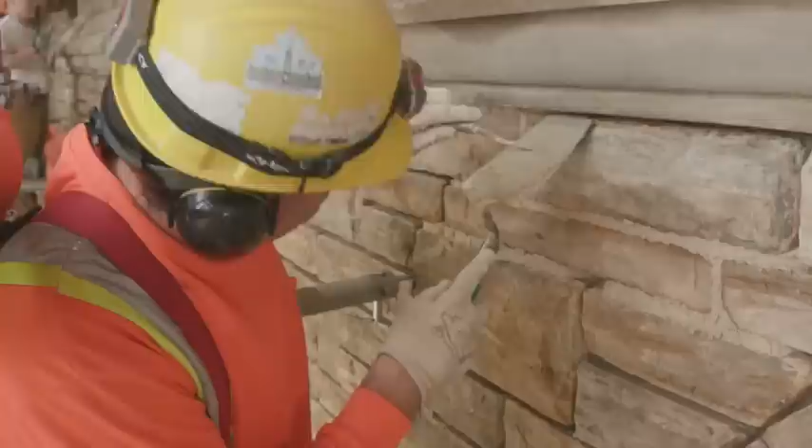In our next episode, we bring you to the steps of Centre Block, where the front lawn of Parliament Hill is now a massive excavation zone. The hole behind me is about 23 meters deep - we've removed about 40,000 truckloads of rock out of it. We'll update you on the work completed in both chambers. Now we're coming from the government lobby and heading into the chamber - likely not recognizable, not at all like you would have remembered before the closure. Learn more about the building's much-needed facelift - there's about 365,000 stones on the building, so it's a very large-scale project. And spend time with Canada's 5th Dominion sculptor: this is a great example of an uncarved block, one of the original blocks left uncarved at the time. All of that on the next installment of CPAC's Inside Centre Block, The Restoration.